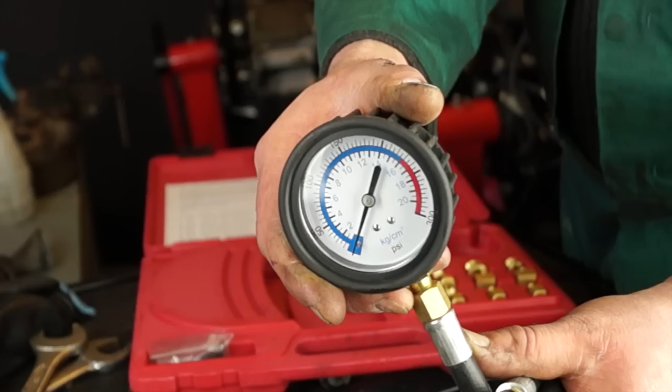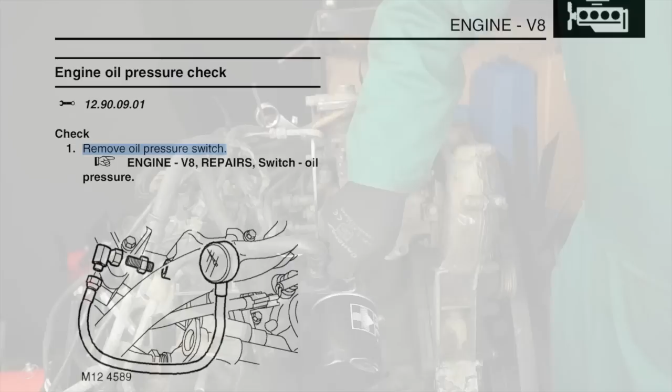Okay, so engine oil pressure check, generally what you'll be doing is removing the oil pressure sensor and fitting in a gauge. This is the best way to access pressure from the oil gallery, or in other words, where the oil is being pumped around the engine. It is an accessible place to fit a gauge in with adapters.

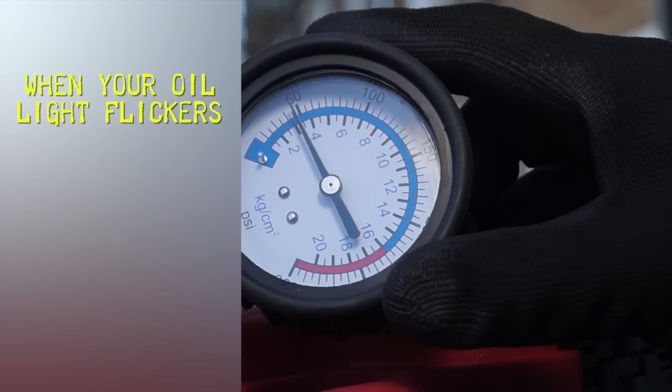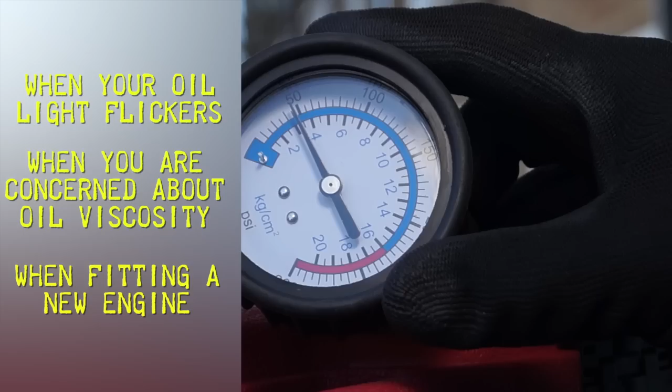Right, so when your oil light flickers, you'd be wanting to use a gauge to see if it's the switch or the oil pressure. You'd also possibly use it when you want to check that the viscosity is right in your engine, to make sure the pressure's there. And also when fitting a new engine. Not many people actually do this, but if you've bought an unknown, how do you know the oil pressure is good? You don't until you check it with a gauge.

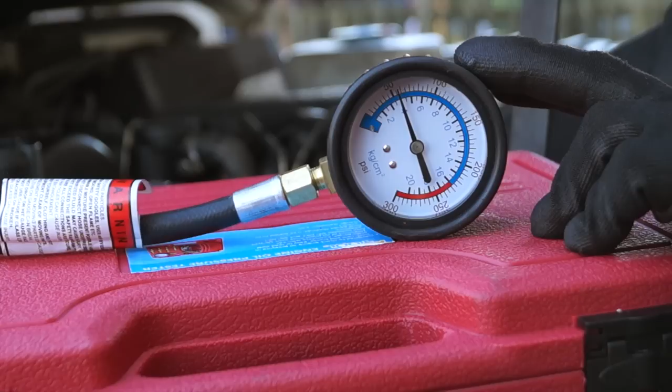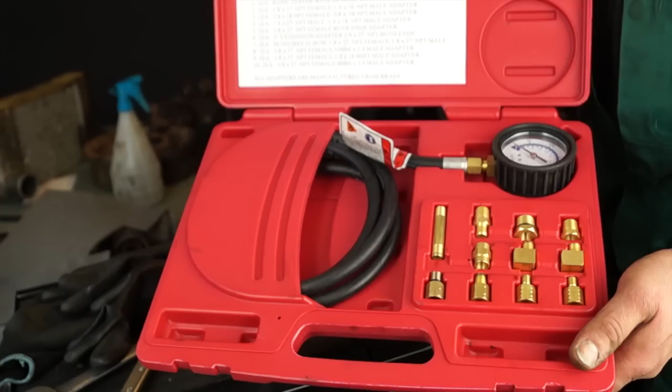Likewise with a clanky old diesel engine, sometimes it's worth checking perhaps yearly on a service just to make sure she's still lubricating well. What we have here is a low pressure tester, a gauge, pipe and adapters. This is for checking pressures on automatic gearboxes and engines. This is a gauge to make sure that the pressure is being supplied from the oil pump to your oil gallery.

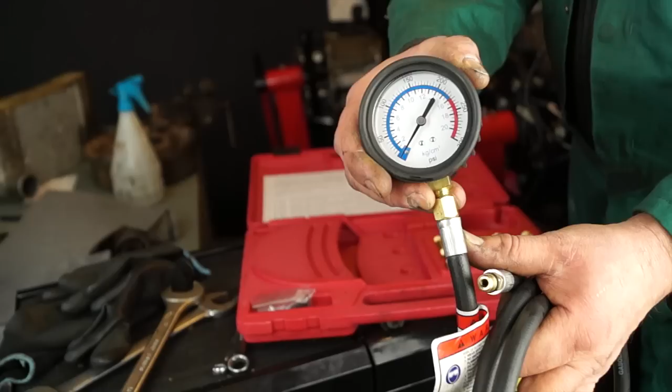This would be no good for checking common rail pressures or power assisted steering pressures, as the pressures in those systems are a lot higher. Okay, so accessing the oil gallery, as I said, would be through the oil pressure switch, because this is the easiest to take out, and there'll be a thread available to screw an adapter in. This engine is the 300 TDI.

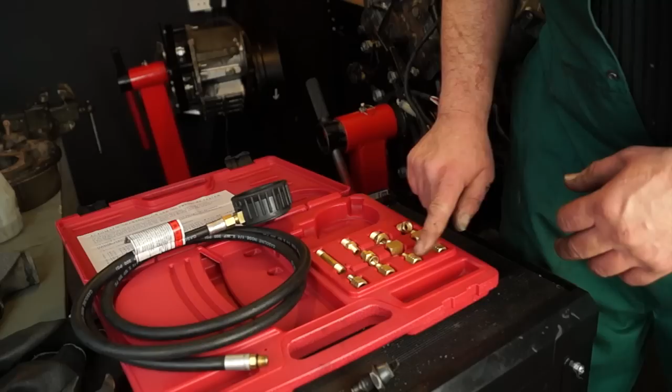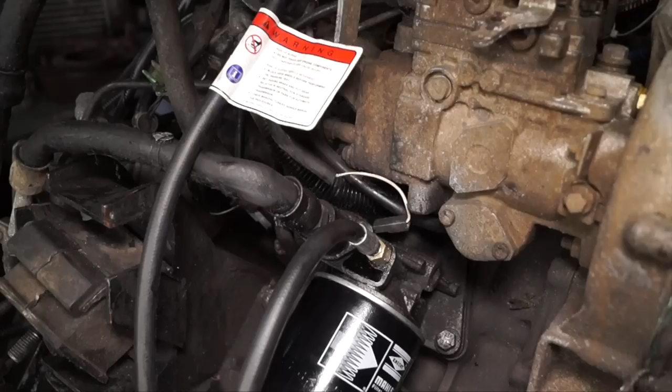Okay, so in the kit you get varying adapters, which are either metric, like this one, or imperial. Now, this is the 300 TDI pressure switch. It is not a tapered thread. Okay, so you see that there. Right, well this is the one we need. So there's not much to this kit. Adapter, your pipe, and then you have your gauge, like so. So once it's set up, you're ready to go.

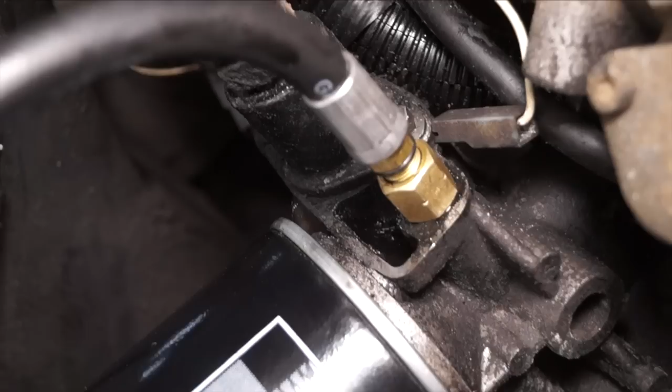Not much to it. You do need O-rings, however, to stop any oil leaks or making a mess while you're testing. And on the pipe, it doesn't need an O-ring because it's actually a tapered thread, so I don't know why that's fitted. Okay, that's a 12mm and a 14mm spanner. These just need to be nipped up. Once they're nipped up, you're ready to go. It doesn't need to be too tight at all.

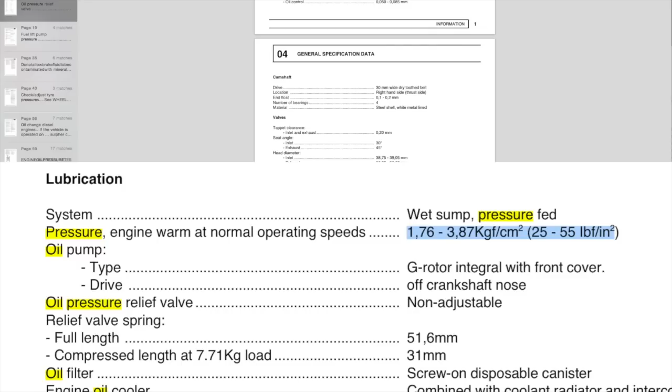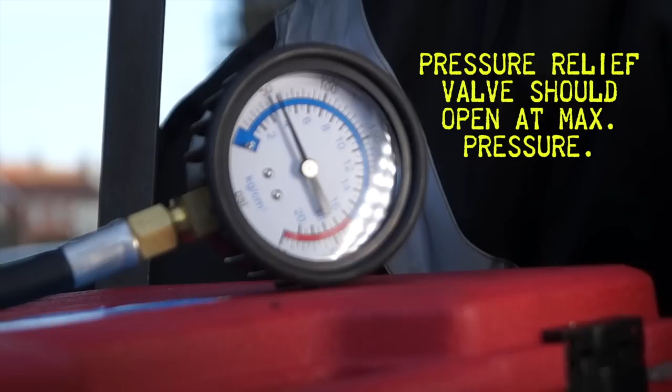In the general specification data, in a workshop manual for instance, this is where you'll find your oil pressures. 300 TDI, you can see here, pressure with engine warm at normal operating speeds will be 25 to 55 pounds per square inch, or PSI. Right, so engine running, you can see a bit of a rev takes the pressure up, and what we're looking for at 3000 RPM is to see if the pressure relief valve opens at max pressure. On the 300 TDI it's 55 PSI, as it does, so we're alright. Back to idle, you can see it's gone back to about 50 or 45. It does actually say that the pressure is quite good.

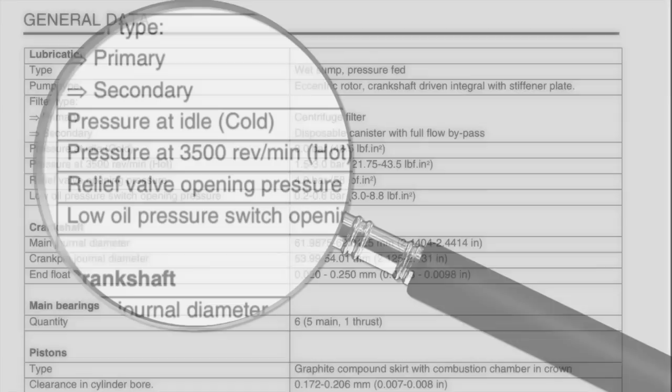Now, the kit is very comprehensive. It has adapters which you can then adapt if you need to, so it is very versatile, okay? And luckily it has the fitting sizes here as well. Looking at the TD5 data, you can check the pressure at idle cold, which should be about 3 bar, 43.5 pounds per square inch, pressure at 3,500 hot, and it will give you the relief valve opening pressure as well.

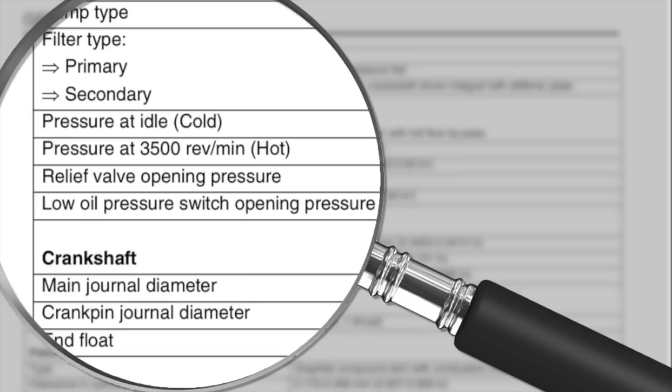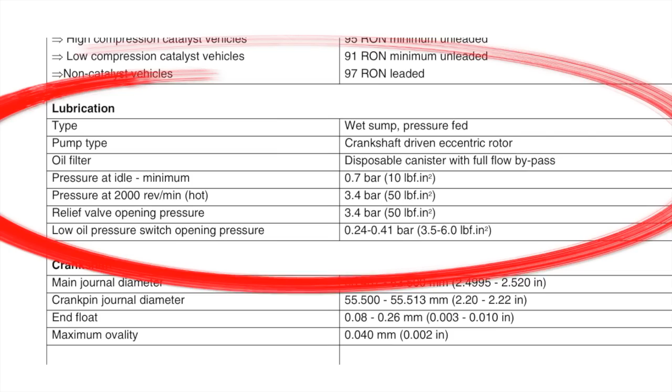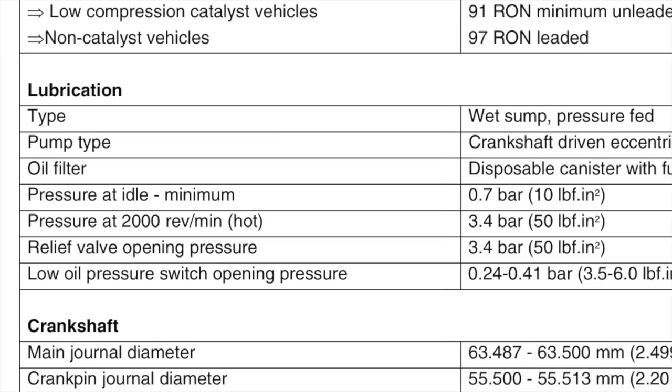Okay, not to take this as gospel, but this is a V8 engine. Pressure at idle minimum is 10 psi, pressure at 2000 rpm hot is 50 psi, and the relief valve opening pressure will be 50 psi again. So these are all different depending on the engine, but the data is available in the workshop manuals that are relevant to the engine. So going back to our 300 TDI, minimum being 25 psi, this is actually pretty good. The oil pump is working well.

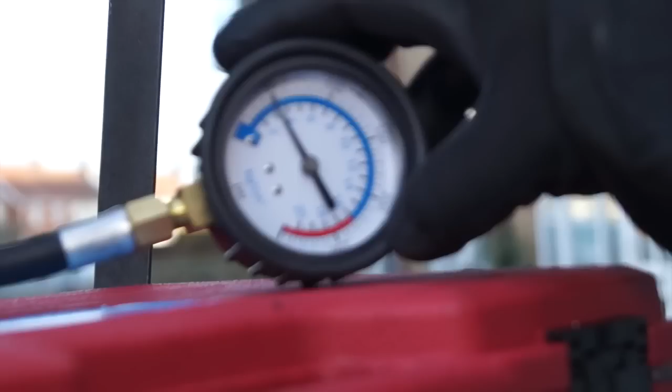The only downside to this kit is you have to struggle to undo the unions like so. However, if you're clever enough, you could put some adapters in there to make it a quick fit. But for the money, this is a brilliant piece of kit. We're going to give it a massive thumbs up from the Land Rover Toolbox videos on this one.